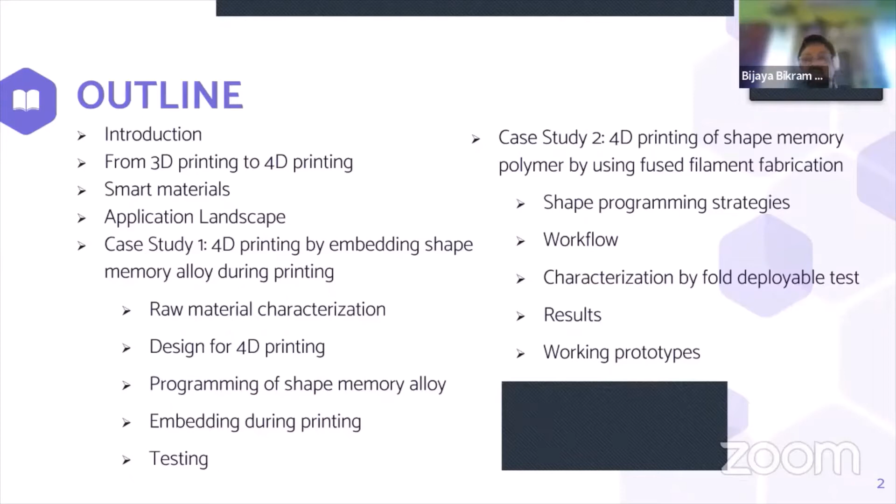Today I'll speak on 4D printing technology. This is the outline of my presentation: I'll start with the introduction to 4D printing, then show how 4D printing evolved from 3D printing, then show some of the smart materials used for 4D printing applications. I'll also discuss the present as well as future application landscape of 4D printing, discuss 2 case studies based on my experiments, and at the end show some working prototypes.

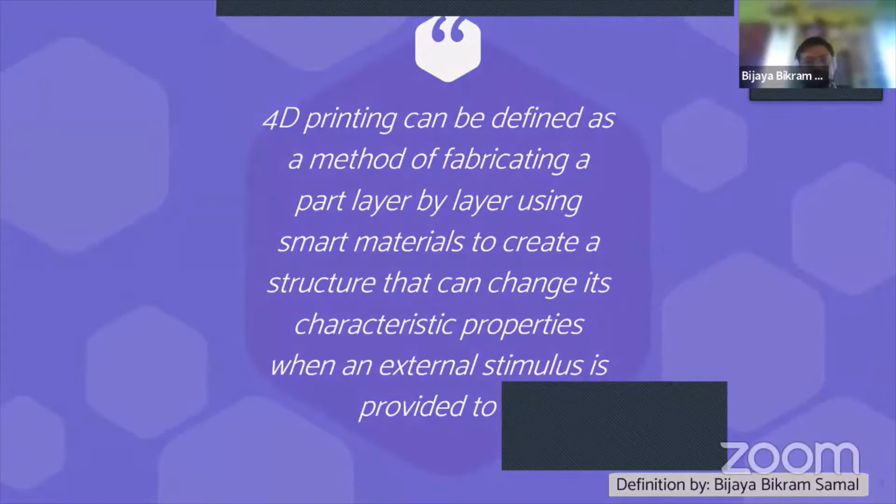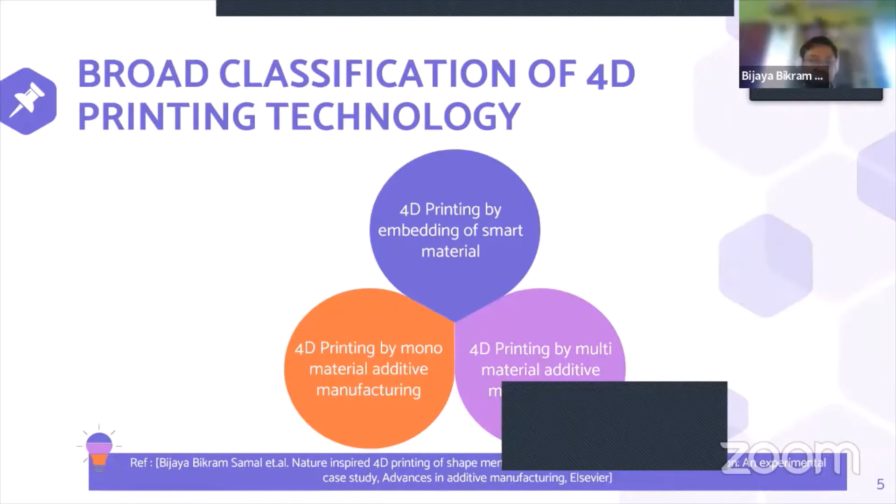In 2001, the very famous company EOS commercialized the first SLS technology, and from that a lot of applications emerged in metal additive manufacturing. In 2003, the first bioprinting began, from Clemson University - Thomas Boland developed the first inkjet bioprinting, developed from the normal inkjet printer that we see in our office.

In 2013 begins the 4D printing concept, provided by Professor Skylar Tibbits of MIT Self-Assembly Lab, USA. From there, a lot of researchers have tried to work on 4D printing, making it better and better day by day. In recent years, just before 1 year, in 2021, the 6D printing concept was provided by University of Athens, Greece.

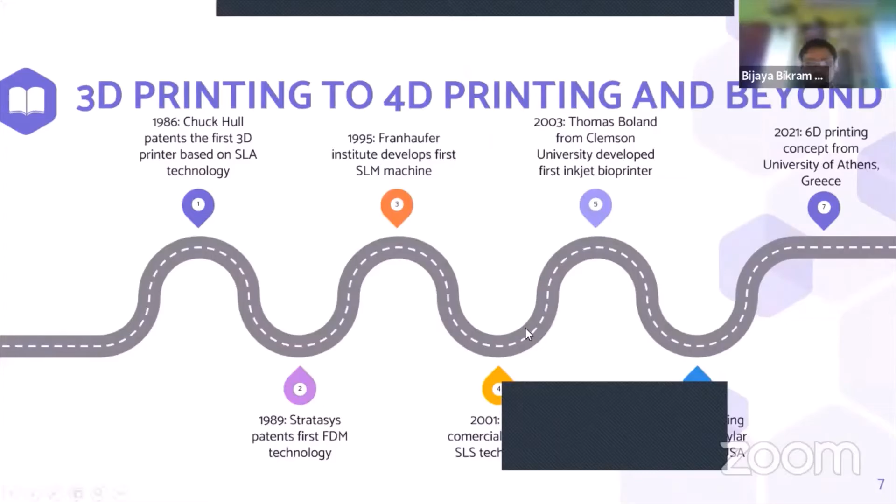So now coming to the types of additive manufacturing as per the ASTM standard. Additive manufacturing is a process where we create a physical object from the 3D CAD model, and we do it by successive addition of the material. As per the ASTM standard, there are 7 types of additive manufacturing process.

The first one is vat photopolymerization, also called SLA, that is stereolithography. Here we have a liquid resin in a container, and we have an energy source that can be UV light or laser. Whenever the UV light or laser interacts with the liquid resin, there are photoinitiators, after which the chain reaction starts and it polymerizes one layer at a time. When we combine many layers, then we get the final 3D printed part.

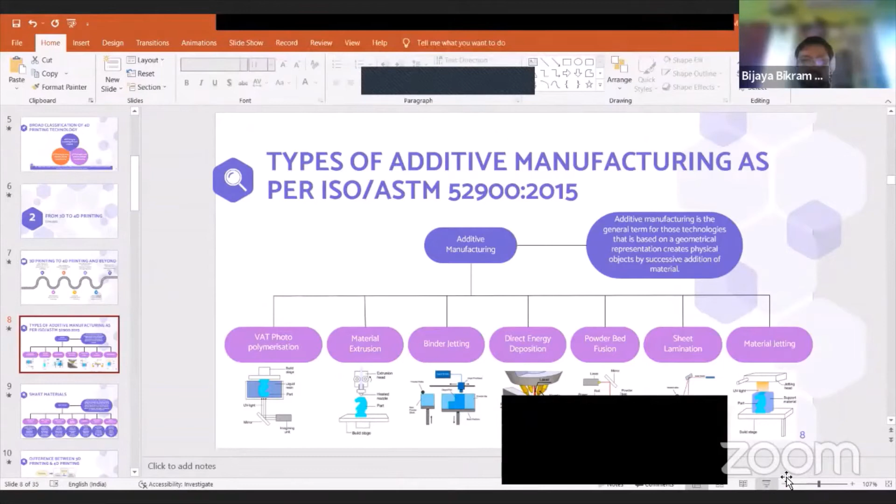Then comes the material extrusion. Sorry to interrupt, but a part of your screen is hidden because of a black patch, around between the 4th and the 6th diagram. There is a black patch. Okay, the direct energy deposition and the sheet lamination sections are hidden. There's still a black patch hiding part of the screen. Just a minute. There are 3 patches now over the top, and I'm not really sure why. Okay, then I'll just stop sharing and share it again. Yeah, sure. Is it there from the very beginning? Hello? Yes sir, it was there from the beginning. Okay, can you see it now? Yeah, the patch is still there. It's still there. So I don't know, actually I'm not able to see any patch here. Not sure what that is. Is there any zoom widget or something present there? Could be that. No, that is not present. I have already done that.

Okay, I'll just share the complete screen. Let's see. Yes, it's perfect, it works now. Okay, that's good. Yeah, thank you. So can I start from here? Yes sir, yes, you can start from here.

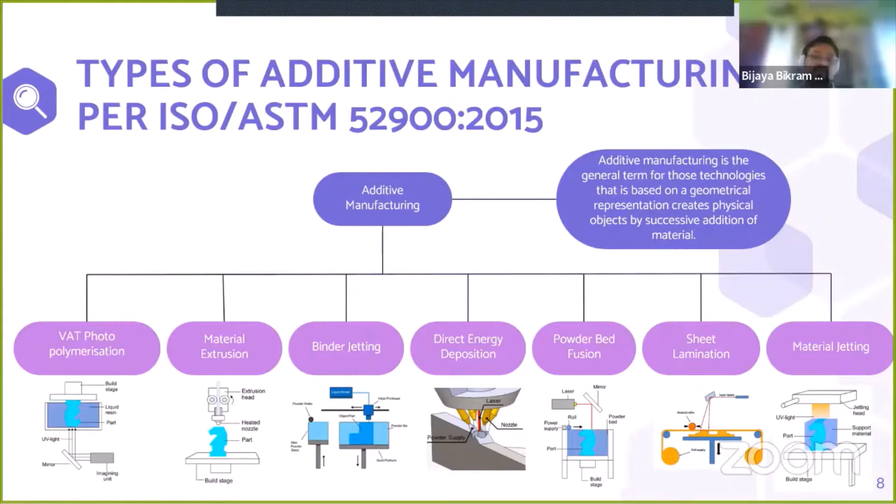Coming to the types of additive manufacturing, as I have already discussed, additive manufacturing is a process where we manufacture the part layer by layer from a 3D CAD model by successive addition of layers. The first one is the vat polymerization or SLA technique. Here we have a tank or storage unit where we have liquid polymer resin, and as an energy source we can have UV light or laser. When the laser interacts with the liquid resin, it solidifies and polymerizes the polymer, and one layer is created at a time. When the different layers are adhered to each other, we get the final 3D printed part.

In case of material extrusion, we have 3 important parts: the extrusion head, the polymer filament, and the heated nozzle. The filament is in the form of a polymer and is fed through the extrusion head, where we have heaters, so it gets heated above its melting temperature and gets pushed into the nozzle and deposited onto the build stage. The build stage can move in X and Y, and the extruder head can move up, so that we can finally get a 3D printed part.

In case of binder jetting, generally we use powder as the feedstock. The powder is deposited on the build platform, and then liquid binder is applied to it in each of the layers. The binder is generally a glue kind of thing which solidifies the layer, and again by a layer by layer process, we get the 3D printed part from binder jetting.

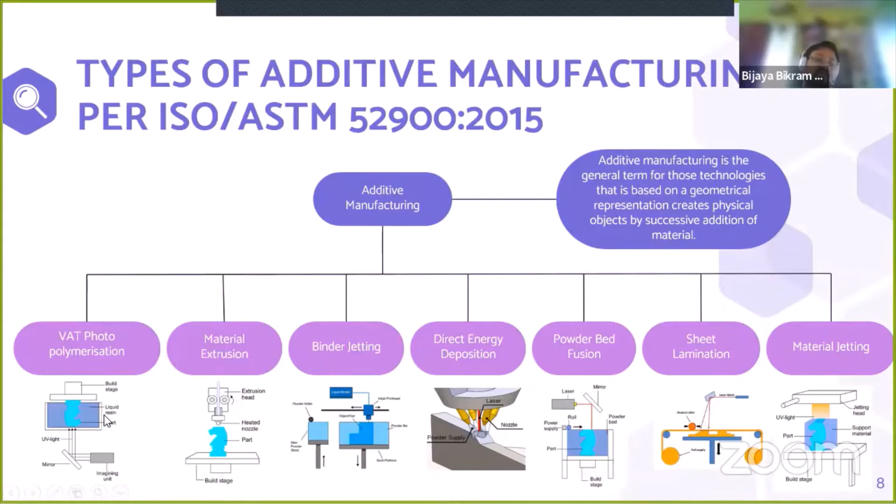Coming to smart materials - smart materials are also called intelligent or responsive materials, and these materials can change their properties when an external stimulus is provided to them. This can be classified into 7 types. The first one is the piezoelectric material, which can convert vibrational or mechanical energy to electrical signals, and vice versa.

Then comes the shape memory alloys. Shape memory alloys are those kind of alloys which can remember their shape when programmed. Now this programming is not a computer program - it's a thermomechanical programming that we generally do, and the mechanism of shape memory effect is due to the solid phase transformation.

And then comes the magnetostrictive material. These are materials which can change their shape when there is a magnetic field.

Then the shape memory polymer. Shape memory polymer is the same as shape memory alloys, except here we use polymers, and the mechanism is due to dual component, dual state, or partial transition mechanism.

Then comes the hydrogels. Hydrogels are those materials which can absorb or de-absorb water to change the shape and size of the structure. So these are water responsive materials.

Then comes the electroactive polymers. These are polymers which can react to an electric field. For example, if I consider a shape memory polymer or any polymer and mix it with some copper powders, CNTs, or graphene, then it can become an electroactive polymer.

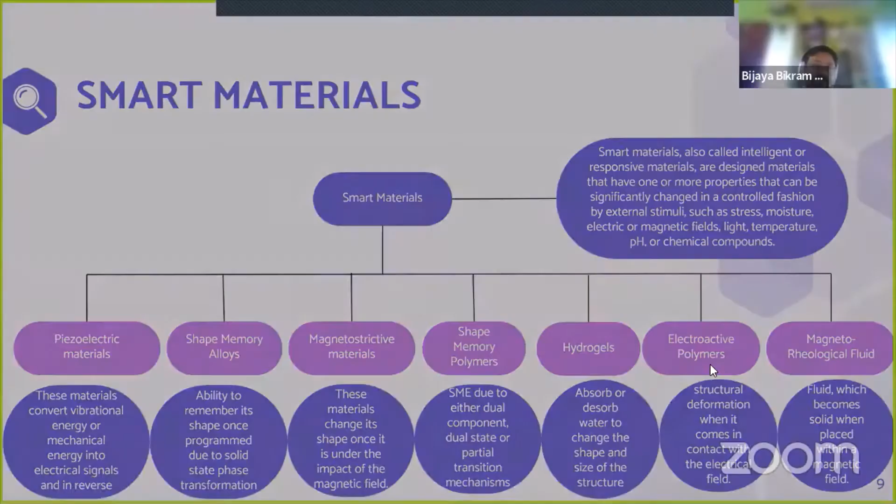So now what is the basic difference between 3D printing and 4D printing? This I have taken from the publication mentioned below. Here we can see that in 3D printing, the material is common and we print it and then we get the final part. That final part cannot change its shape and size in any environmental condition.

But in 4D printing, the material is changed. The technology of 3D printing remains there, but the material changes. So here we use smart materials, and along with that, we can also use multi-material 3D printing. This inverse problem modeling is generally the design for 4D printing, and once the static structure has been created, then when we provide it some stimulus, it can change into a dynamic, intelligent structure.

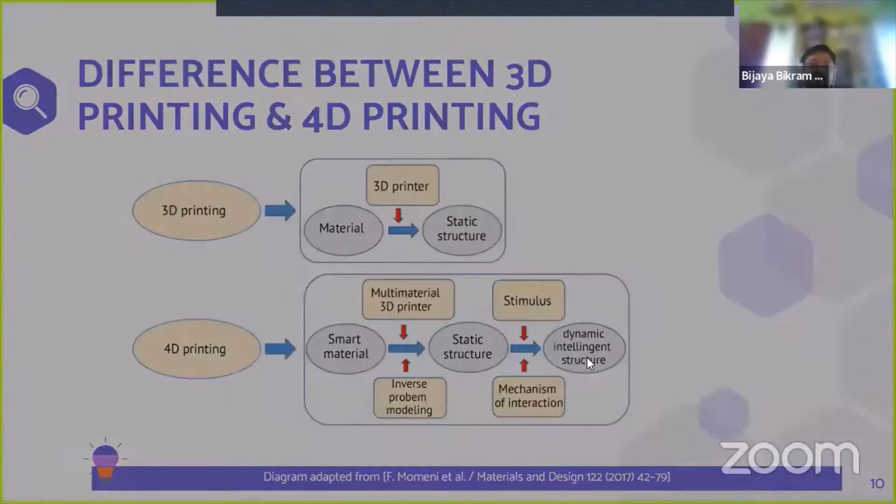Now this is the process for 4D printing. So for the process of 4D printing, it includes three major things.

The first one is the selection of the right smart material. Once that selection is done, then we can choose the energy source as per that. This selection of the smart material can be done as per our applications, and selection of the energy source depends upon the selection of the smart material.

For example, if I am considering some shape memory polymer that is thermoresponsive, then of course my energy source should be heat. Now these energy sources are generally passive energy sources like heat, pressure, temperature, pH change, anything like that. And the third major thing is the precise positioning.

This precise positioning is the design for 4D printing. So in this design, we have to think about what the shape will be after morphing or changing, so that we can design it beforehand and create some hinges or angles, so that after the morphing the geometry can be changed.

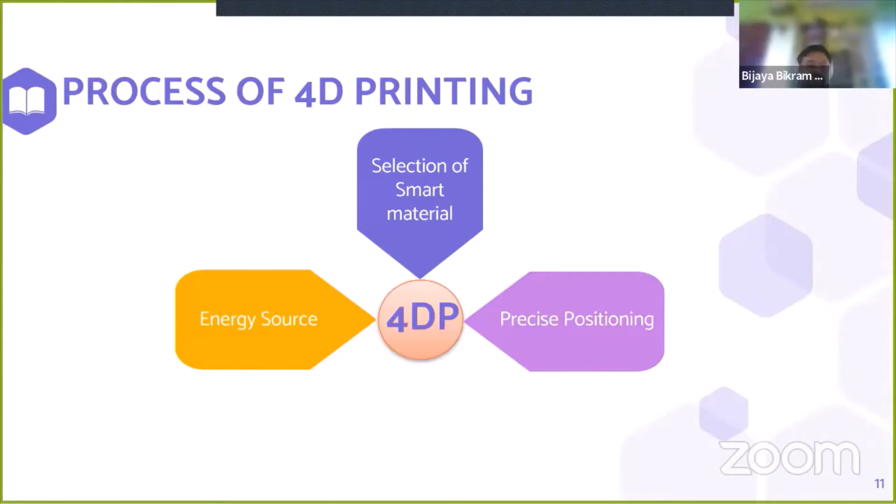Now coming to the application landscape of 4D printing technology. There is a lot of applications for this technology in all fields of science, engineering, and technology. We have divided it into three: first is electronics and power, second is industrial space and healthcare, and third is consumer and appliances. I have shown it from 2021 to 2025, keeping in view what final applications can be.

Recently in electronics and power, we have seen many researchers working on smart optical switches and adaptable sensors, and in future we can see adaptable and active microwave structures, adaptable solar panels, etc.

In industrial space and healthcare, a lot of people are working on bioprinting, developing materials for bioprinting, soft robotics, self-healing materials, and patient-specific stents. In future, we can see smart valves, adaptable tire compounds, smart buildings and pipes, stimulus responsive space, deployable structures, etc.

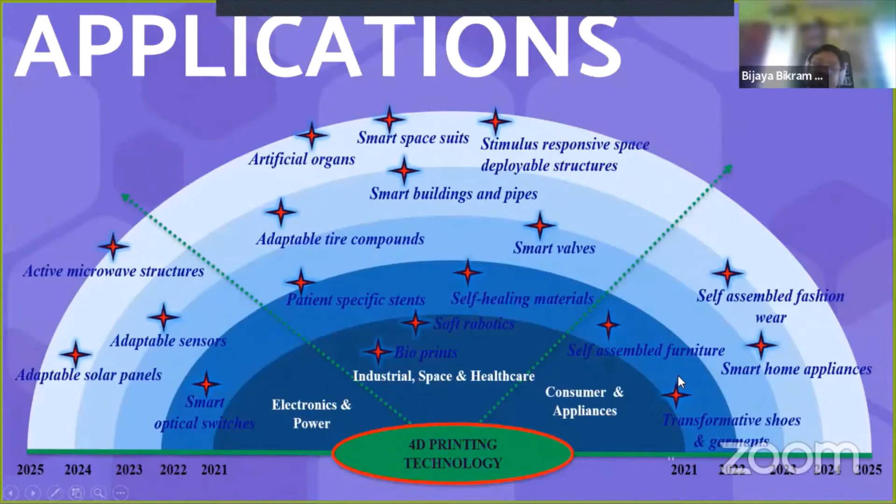In consumer and appliances, a lot of work is going on at MIT Self-Assembly Lab, where they are producing self-assembled furniture, transformative shoes and garments, and in future we can get self-assembled fashionware and smart home appliances.

So now I'll discuss case study 1, which is based on my MTech work that I had done at Veer Surendra Sai University of Technology, Burla, Odisha.

This is the first category of 4D printing, that is 4D printing by embedding of the smart material during printing. This is the complete overview of the process.

The process starts with the 3D CAD model. Once we are done with the 3D CAD model, then we can go for the preparation of the material. This preparation of the material can be done using any manufacturing process like cutting, drilling, but there is a lot of other things also going on.

Because shape memory alloys like nickel titanium are very difficult to machine, for our case we had used wire cut EDM for cutting, and we had used laser micro machining and electrochemical micro machining for drilling.

We have also used design of experiments and found out the optimum result, but I will not discuss that part. This is another upcoming research area, that is the machining of shape memory alloys.

Once the preparation of the material is done, then we can go for the programming of the material. Programming of the material can be done using bending. First we have to bend the part, then heat it, then quench it, then again bend it to a temporary shape.

Once that programming of the material is done, then we can go for the 3D printing with embedding of the nickel titanium shape memory alloy. This 3D printing with embedding can be done by first 3D printing the base, then we have to pause the printer, embed the sheet, and then resume the printer.

Once this 3D printing with embedding of the nickel titanium shape memory alloy is done, then we can go for the testing.

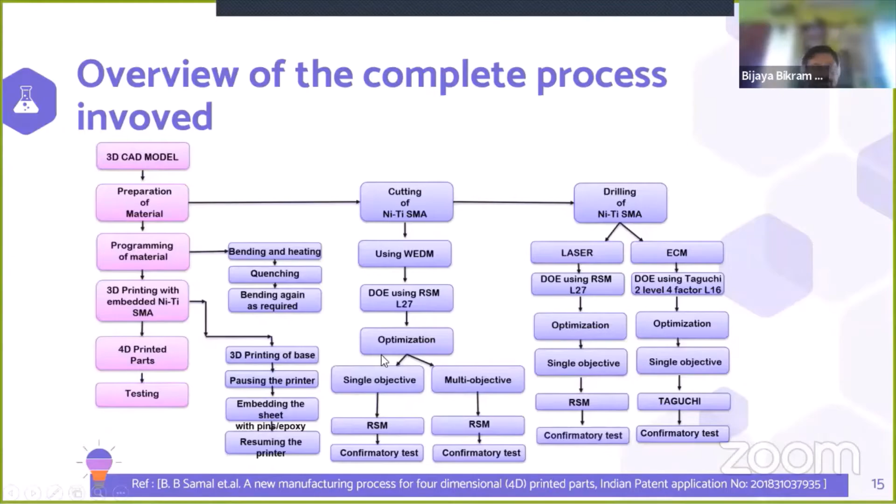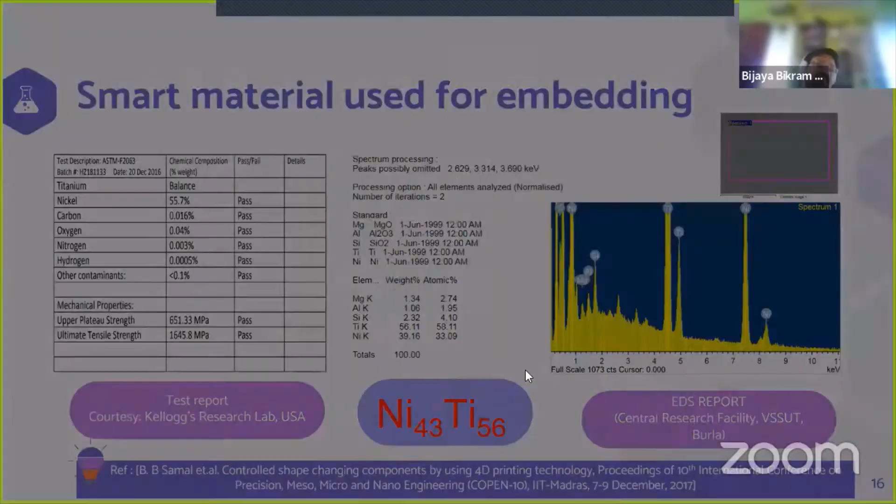So this is the design for 4D printing. Here I have focused my output prototype as two. The first one is a 3D model of an origami, and the second one is a 3-jaw gripper design. I printed and created this origami cube just to show the capability of 4D printing with embedding of the shape memory alloy.

This 3-jaw gripper design I had created so that we can use it to grab something from hot water without using any motor or actuators. Here we can see we have considered a lot of design parameters, like a chamfering of 45 degrees, keeping in mind that our output is to create a structure that is perfectly 90 degrees.

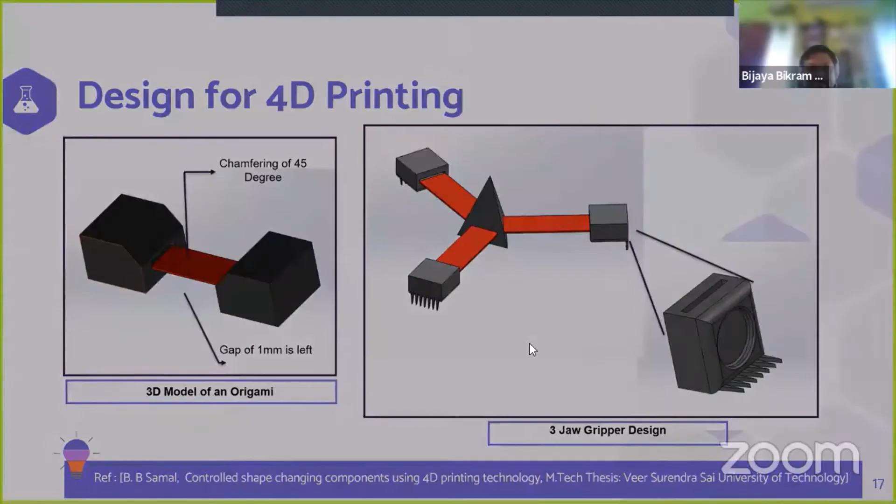So this is the programming strategy for shape memory alloy. Programming is a process where we train the material to behave in a way that we want, like training it to bend whenever an actuation temperature is provided to it.

First, we have to bend the sheet and fix it in a fixture, then heat it above the transition temperature of the material, then quench it in room temperature water. Once that is done, the material has remembered its shape, that it has to change to that programmed shape whenever a triggering temperature is provided.

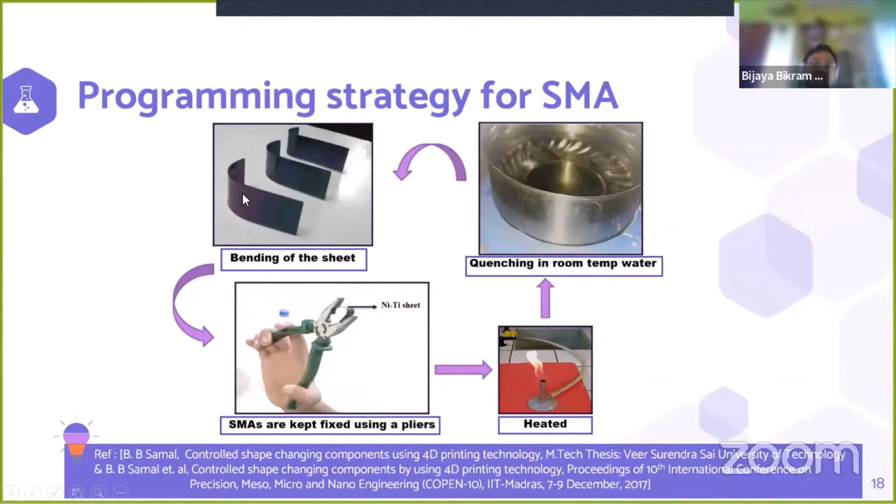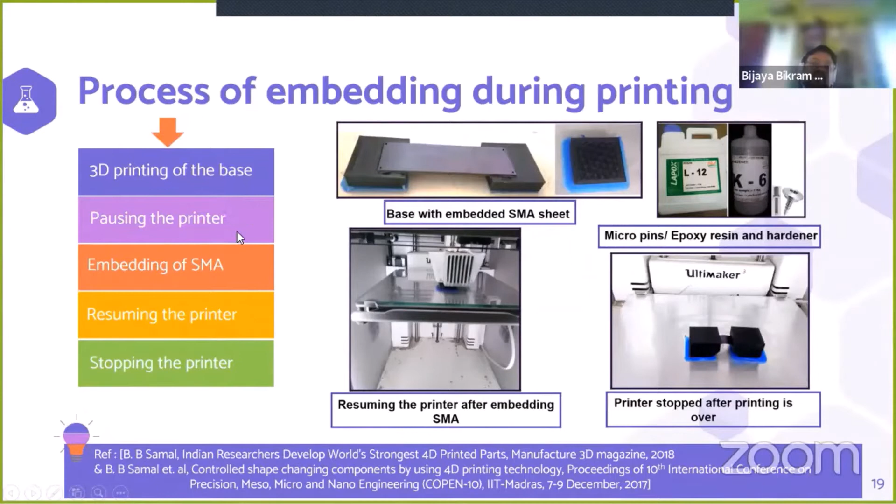This is the whole process of embedding during printing. First we have to print the base, then we can pause the printer and embed the shape memory material in between like this, then resume the printer. Once it is completed, we can stop the printer. Here I have used the FDM setup, that is Ultimaker 3.

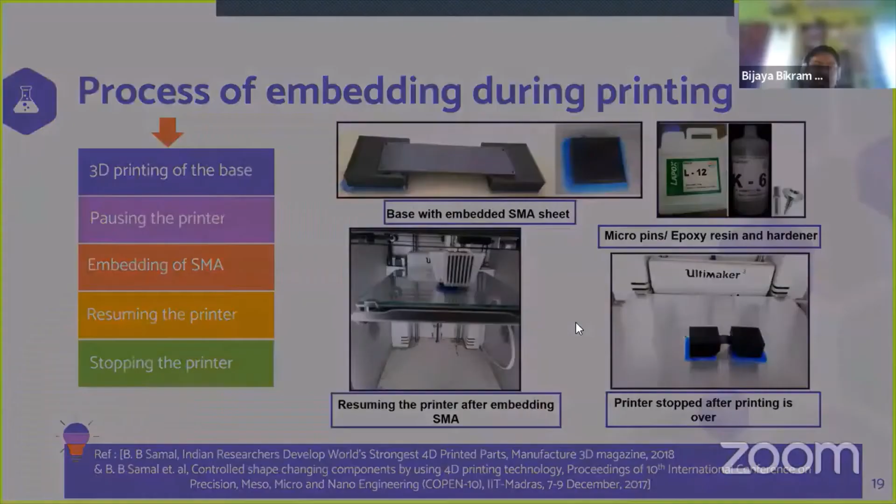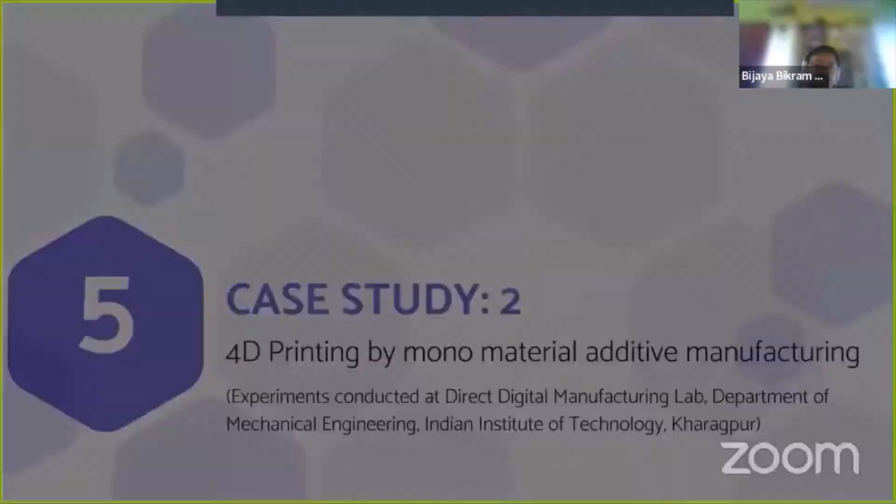So case study 2 is based on my work at Direct Digital Manufacturing Lab, Department of Mechanical Engineering, Indian Institute of Technology Kharagpur. It is the second category of 4D printing, that is 4D printing by monomaterial additive manufacturing. Here we have considered a shape memory polymer to print it.

First, before going deep into that, we must know the mechanism of shape memory effect in any thermoresponsive shape memory polymer. The common structural features of any shape memory polymer are the shape fixing part and the shape switching parts. Shape fixing parts are the net points within the polymer matrix, here you can see, and these are responsible for the dimensional stability of the material during deformation.

The shape-switching parts are long polymeric chains that can take up elastic energy whenever we are deforming it, and it can recoil and recover back when a triggering temperature is provided. That is the mechanism of shape memory effect in any thermoresponsive shape memory polymer.

For characterization of the shape memory properties, we need to look at two important things: shape fixation and shape recovery.

Shape fixation is the property of the shape memory polymer to get fixed at a certain angle or position. If we consider an analogy of an elastic rubber band: if we stretch it and leave it, it will not stay fixed at that point, it will recover back. That is the elastic property of the material.

But if we have a material that gets fixed at that point, and whenever we provide some external stimulus it recovers back, that is the shape memory property. Shape recovery is the property of the shape memory polymer to recover its fixed point whenever we provide some triggering temperature to it.

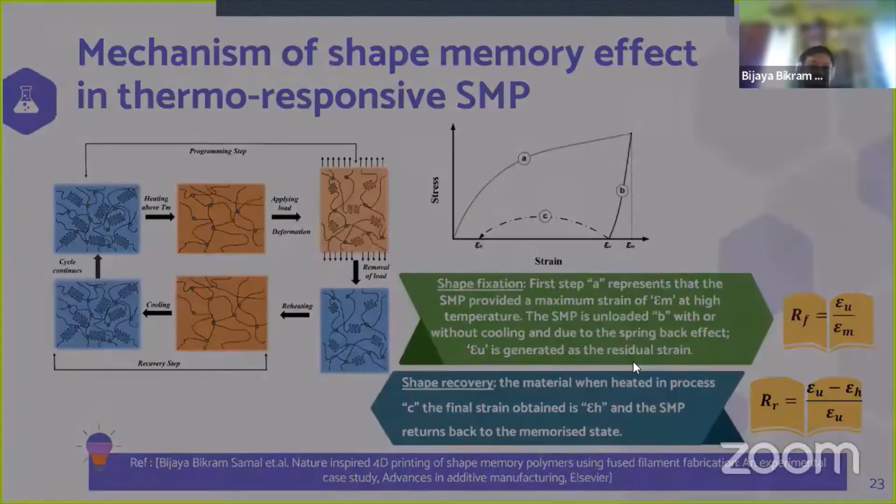Now we can discuss the shape programming strategies. In case study 1, I already discussed programming of shape memory alloy. Here we can see the programming is done by first having a 3D printed part, then we fix it in a fixture in our desired shape. For example, if our final shape is 90 degrees, we fix it as per that, and heat it above the glass transition temperature of the material.

Then we cool it or quench it, and this completes the programming cycle. Once it is completed, we can go for the recovery.

For the recovery cycle, we deform it to some temporary shape, and whenever we provide some triggering heat, it recovers back. Now we have made the material remember its shape to be 90 degrees, but it is not 100% recovery. That percentage of recovery can be calculated, and that's why we are interested in it.

Now let's see why I am using FDM 3D printing to process the shape memory polymer. What is the motivation? This programming process that we generally do is a post process, and it needs time and effort.

During the FDM 3D printing process, the material is fed through the nozzle, and there is a heater heating it above its melting temperature, and it gets deposited onto the build platform. Whenever it is deposited onto the build platform, the fixing part is getting automatically done here, and the heating part is also done here, because it gets heated and only then deposited.

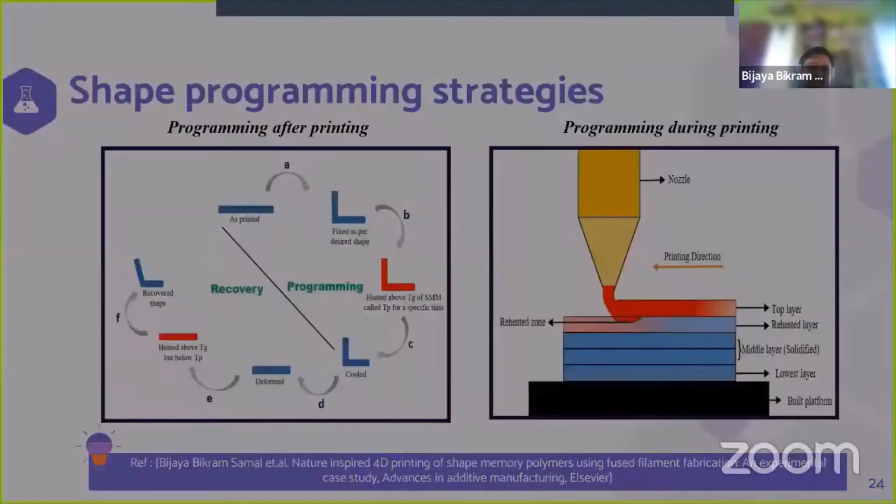Once that is done, my aim is to check which kind of processing and which kind of programming is better. For that, I have done the experiments. First of all, I created this CAD model.

I have considered a few design parameters, like chamfering of 45 degrees, because my final part needed to be 90 degrees. Once the CAD is done, we go for slicing the part using Simplify3D. We sliced it, and after that we used a DIY low cost 3D printer to process the shape memory polymer.

Here we varied a few parameters, like printing speed and extruder temperature, because my aim was to check whether printing speed has any effect on the shape memory properties, and also the extruder temperature. I varied these, keeping other parameters constant, and produced the part.

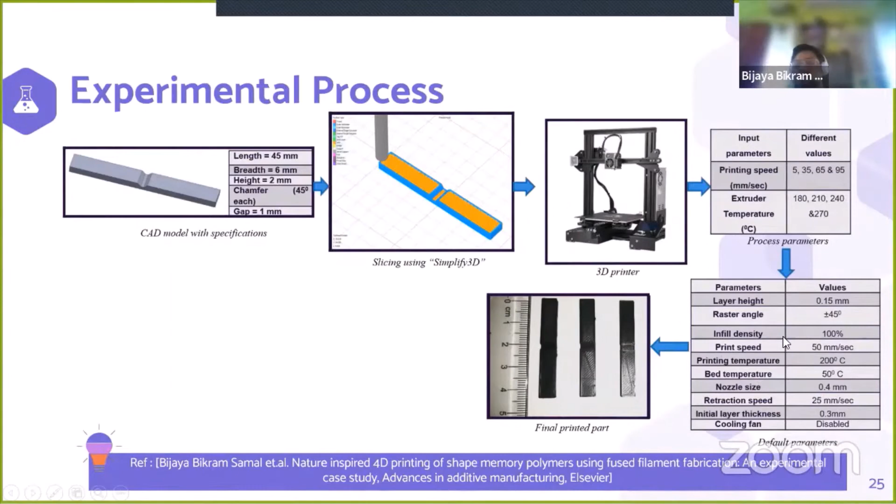After that, we go for the characterization. For the characterization, we used the fold deployable test, because it is a very low cost and robust technique to find out the shape memory properties.

So we have a testing setup here, an in-house testing setup, where we have a tank with hot water, and we can control the temperature. We have created this angle measurement scheme to find out the shape recovery, shape fixation, and shape memory index. For two cases, programming during printing and programming after printing, we have different angle measurement schemes.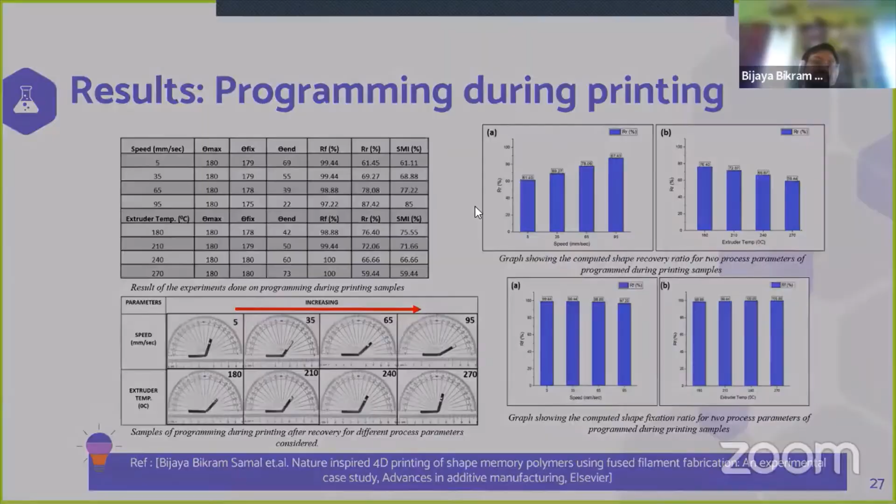Let's see what is the result for programming after printing. Here also the trend is the same: with increasing speed there is an increase in recovery, and with increasing extruder temperature there is a decrease in recovery. But the difference is that here we got recovery of about 45%, while there we had gotten around 87%.

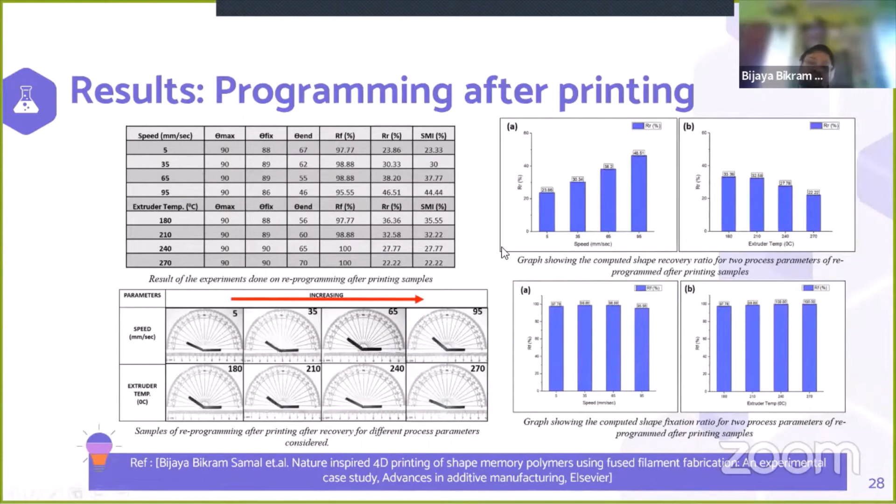So we can say that programming during printing is a very good option if we are going for 4D printing of shape memory polymer processing using FDM 3D printing.

Now I will show some of the working prototypes. The first prototype is a scaffold structure, a wood pile structure. When we provide some stress, it gets deformed, and when we heat it, it can recover back. This can have a lot of applications for minimally invasive scaffold deployment and drug-eluting bioresorbable stimuli-responsive scaffolds.

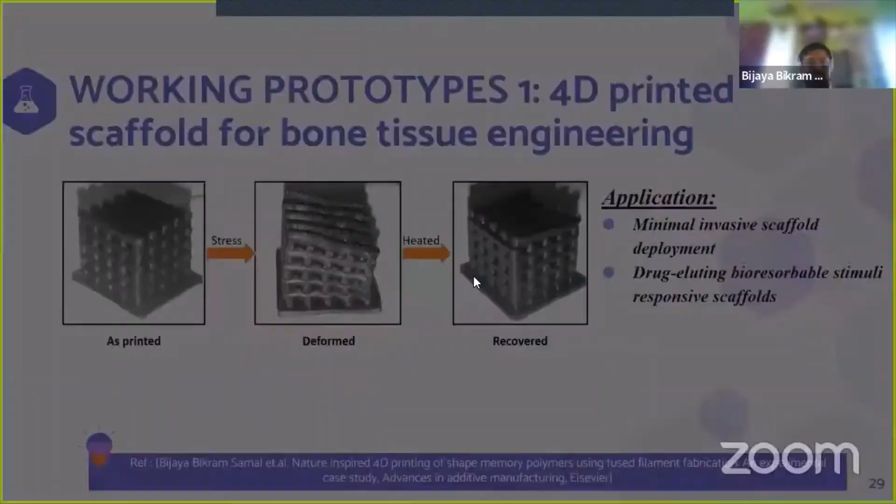The second prototype is an origami cube that we have printed, keeping in mind that it can be used for space deployable structures and thermal actuators. Here we have varied the processing parameters based on our earlier experimental results.

I printed it using low speed and high extruder temperature. We can see that when using low speed, the time for recovery increases. Here it took around 13 seconds for the cube to recover, and the recovery is not full. This is the origami structure, from which we can create the cube.

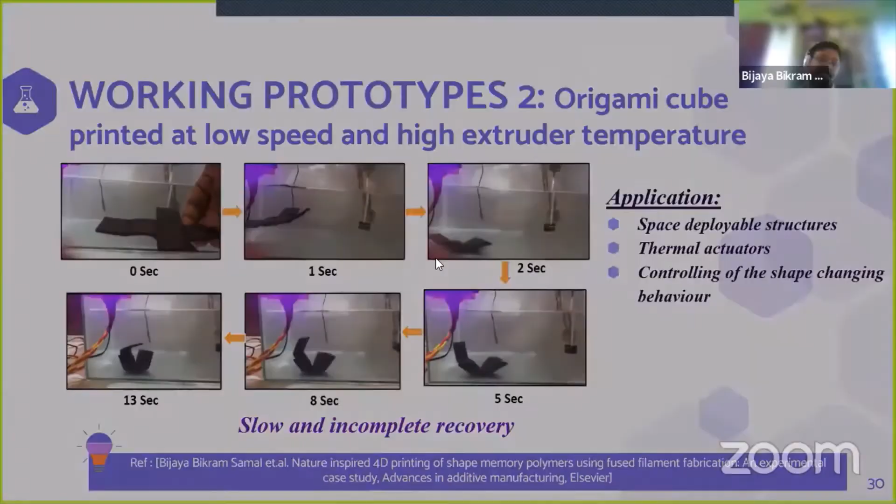This is the same prototype, but printed at a different processing parameter: high speed and low extruder temperature. When printed this way, the same part takes only 2 seconds to recover, and it is also a full recovery.

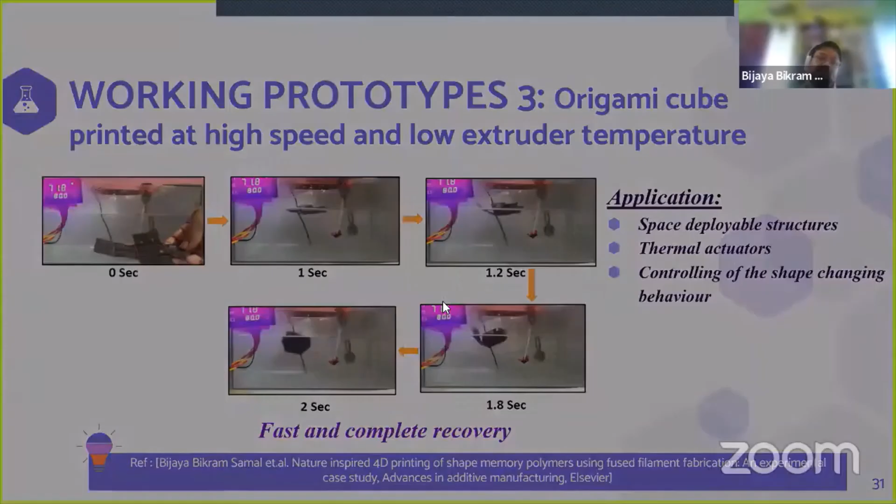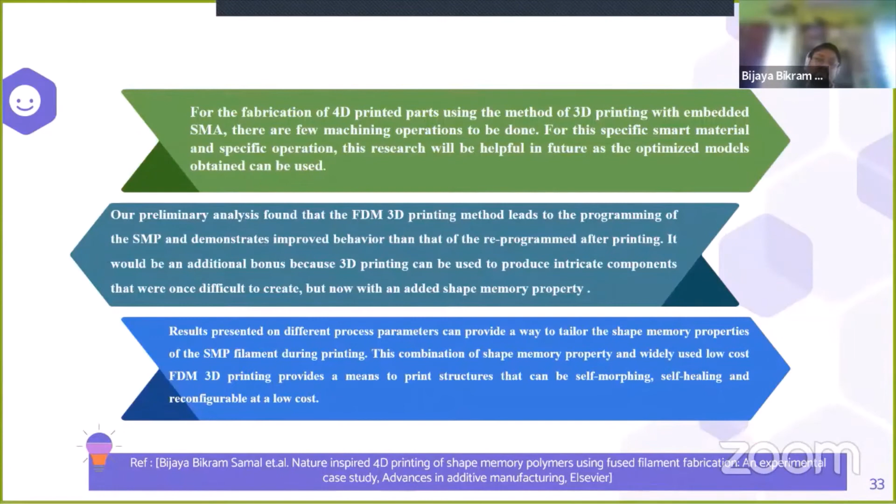From this we can conclude that by using the FDM 3D printing process, we can create a lot of 4D printed structures and actuating joints, and many other structures. Using the first case study, embedding the shape memory alloy into the polymer, we can also create 4D printed parts. We have seen that by varying the processing parameters, we can vary the shape morphing behavior of the 4D printed part.

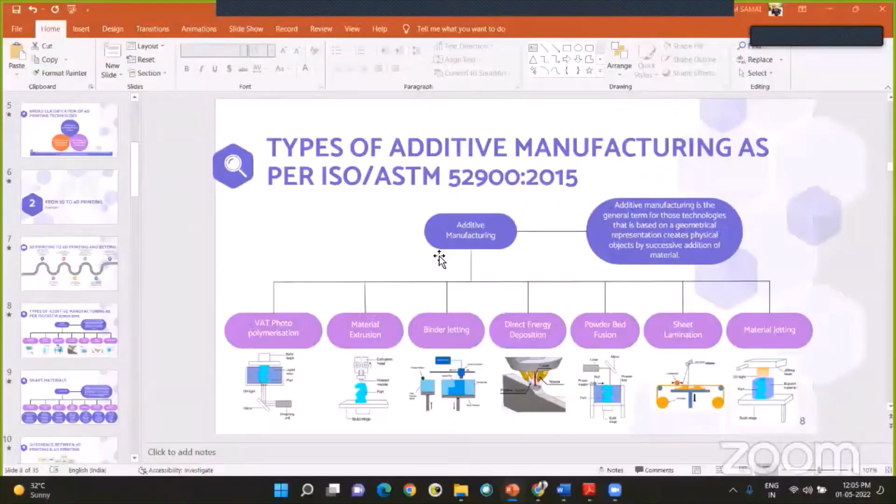Good morning, sir. We have a question from Arjun, who's in his 5th year of MNT. The question is, can other forms of stimuli like ultrasound, microwave technology, or chemical stimuli like pH be used to create smart materials for 4D printing? If yes, how can we tackle the limitations as well?

Yes, you can do that. A lot of people are working on that only. The limitations are controlling the morphing behavior. Presently, I am also facing the same challenge, and that is what I am trying to solve. The main challenge is how you can predict the morphing behavior beforehand and how you can control it during the process, so that you can get a controlled mechanism. If you are using it for space deployment or biomedical applications, you need to have control over the shape morphing behavior. So that controlling is the recent challenge that a lot of people are working on.